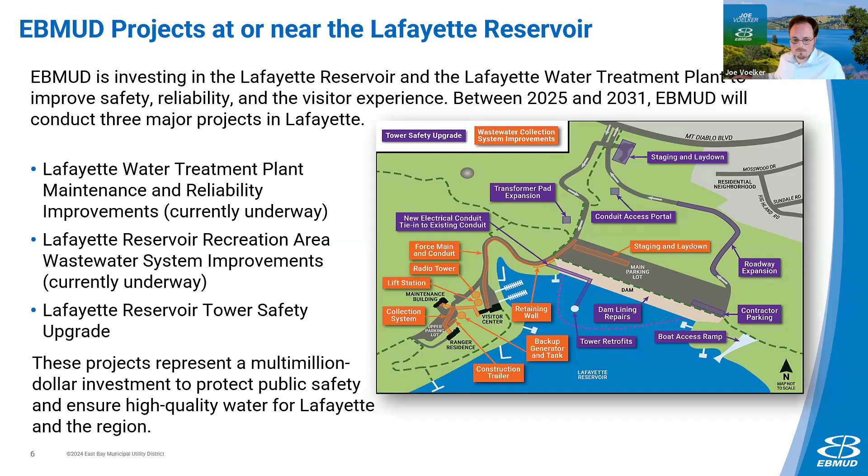Several of these efforts are already underway, and I'll briefly walk through how those projects align before getting into the tower project here, schedule-wise.

This timeline shows how these projects align. Water treatment plant reliability work began in the fall of 2025 and will continue through 2031. The wastewater project also began in the fall of 2025 and continues through the fall of 2026. Preparation work for the tower has been underway since last summer, with major construction scheduled for spring 2026 through fall 2027. We're coordinating these efforts closely so we can reduce overlap and limit impacts as much as possible at the reservoir and the surrounding area.

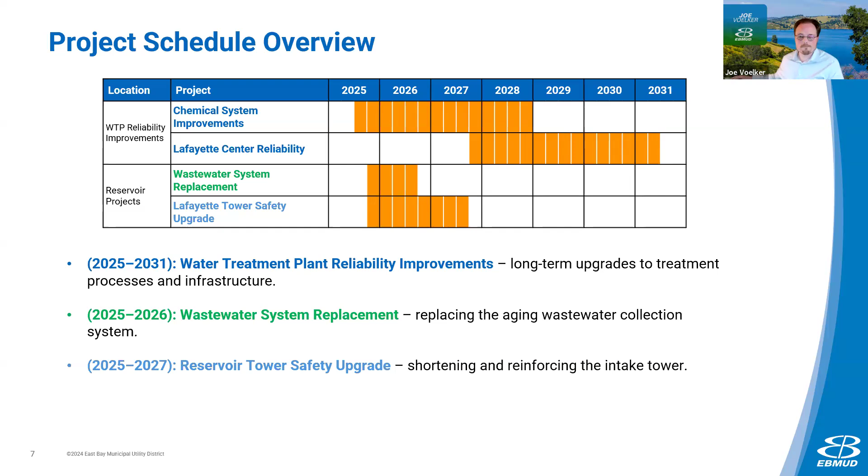Okay, so now we're going to turn specifically to the tower safety upgrade project. I'm going to review the tower's history, the regulatory requirements driving this project, and the scope of construction.

The outlet tower was constructed in 1928 as part of the original reservoir system. Its purpose is to control reservoir water levels and regulate releases through the dam. While the dam was still under construction, ground movement occurred, and because of that, the final height of the dam was reduced from the original design. The dam was completed in 1933, and since that time, the reservoir has operated safely and reliably for decades.

When the dam height was lowered, the tower remained at its original constructed elevation. As a result, today the tower extends approximately 40 feet higher than is necessary for the current reservoir's operations. That height difference is part of the historical context for the project we're discussing tonight.

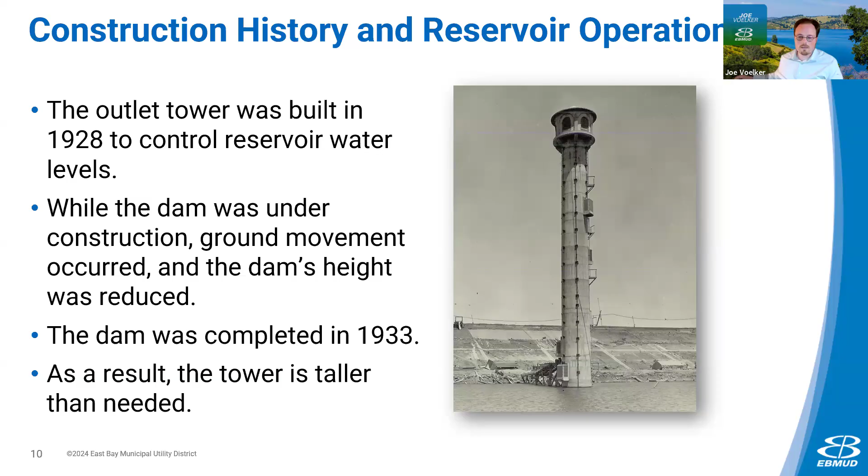The Lafayette Reservoir Dam itself remains operational and safe. The outlet tower, as we just discussed, was built nearly a century ago and was designed for a different dam height. Over time, seismic standards have evolved, especially here in California, and upgrades are required to meet today's criteria.

The California Division of Safety of Dams oversees dam safety across the state and regulates all of East Bay MUD's dams, including Lafayette. They mandated this upgrade, and they have reviewed and approved the project plan we're presenting here tonight. We've incorporated their input, and they'll remain involved throughout construction.

This project is about safety. It's about maintaining the safety of the Lafayette Dam, protecting the reservoir, and ensuring the continued safety of our downstream communities.

If you're interested in more of the technical history of the tower and the dam, how this design was developed, and how we worked with the community throughout this process, that information is also available on our project webpage. You can also watch the recording of the October 2025 community meeting, which I just walked through, for more detailed technical discussion about the project.

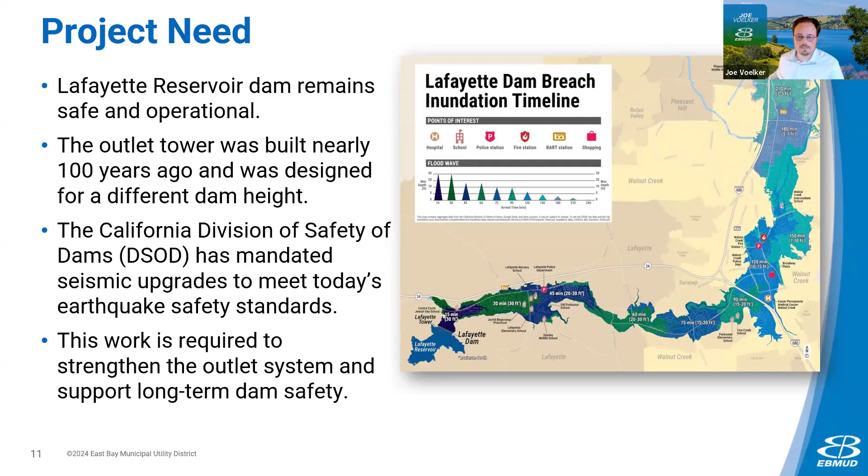At a high level, this project includes safety upgrades required by the state to bring the outlet system up to today's seismic standards. The most noticeable change will be when we increase the resiliency and shorten the tower by about 40 feet so it better matches the current dam height.

We'll also be upgrading the outlet conduits that run underneath the dam and move water from the reservoir. These are key parts of the outlet system and need to meet the modern seismic criteria as well. In addition, we'll be doing maintenance and equipment upgrades to help ensure the dam and tower continue operating reliably for decades to come. Construction is planned to begin in the spring of 2026 and continue through fall of 2027.

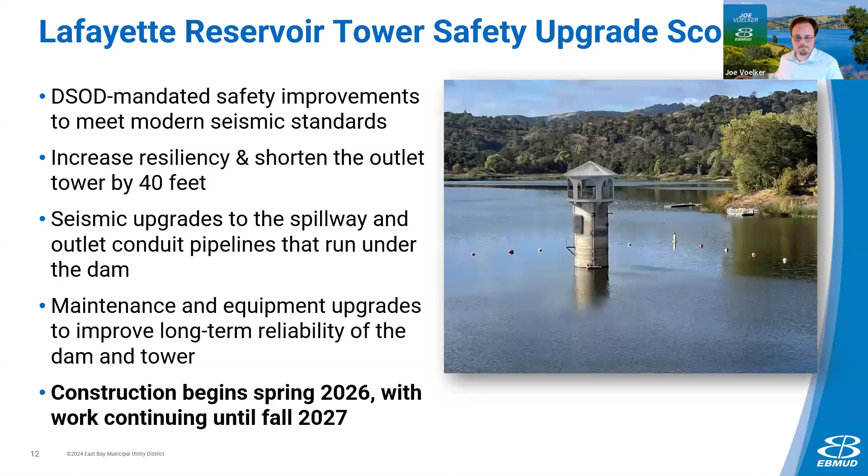Now that we've covered the history and the need for the project and what the work will include, let's talk about what construction will actually look like and what visitors should expect at the reservoir over the coming months.

As I mentioned, construction will begin in spring of 2026 and continue through fall of 2027. This work will take place in several phases. The early phase will focus on site setup, staging areas, and access improvements to prepare for the work. The tower and dam construction is expected to occur during the summer through the fall of 2026, with additional work continuing into the fall of 2027 until the project is completed.

Construction traffic will access the site from Highway 24 using the Acalanes Road exit, and there will be no hauling through downtown Lafayette. Work will generally occur Monday through Friday between 8 a.m. and 6 p.m.

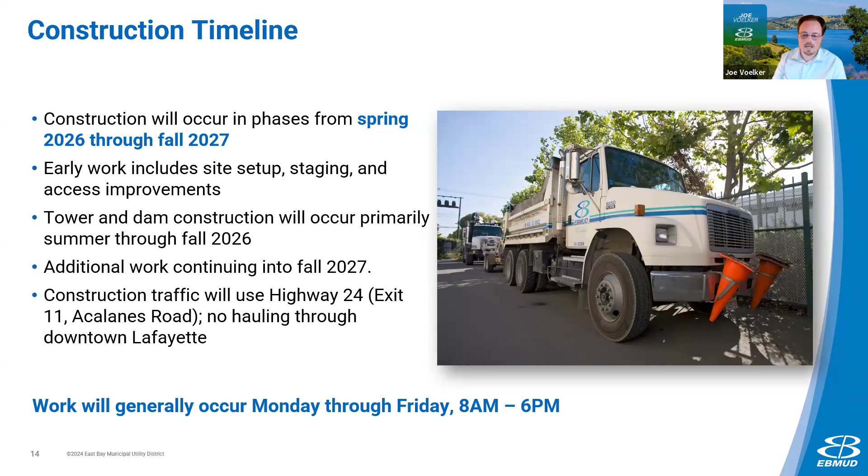This gives you a visual of where the main construction areas for the tower project will be located around the reservoir.

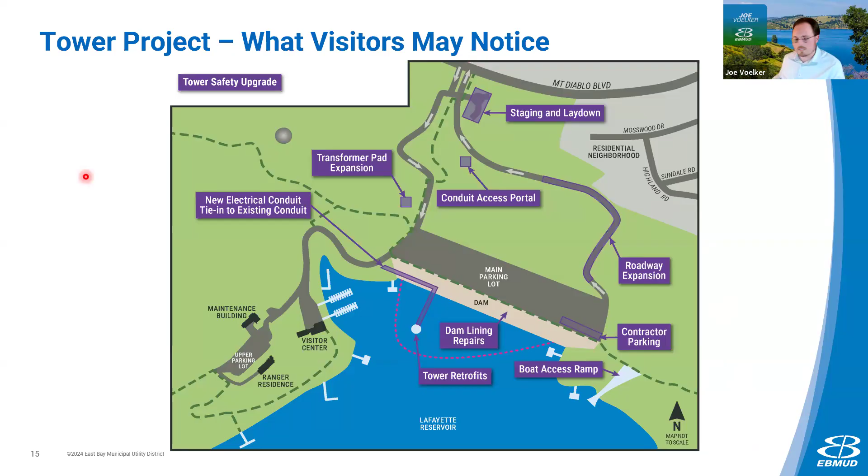I wanted to put this slide on here so you can see the total impact and cumulative effect of what you're going to see when you come into the park. You'll notice a staging and laydown area here, and you'll see stuff throughout the park. We're going to get into every specific on what you'll see and how you'll feel it over the next coming slides.

Beginning next month, approximately the third week of March, construction crews and equipment will mobilize to the reservoir. During this initial phase, two staging areas will be established and a temporary field office will be constructed to support this project.

Throughout March and continuing through the end of April, crews will be performing tree work in designated areas and widening the access road. Because of that road work, visitors may experience temporary delays when exiting the park. At times, crews will be flagging traffic to ensure it is safe to leave, and delays of approximately 15 to 20 minutes are possible during this period.

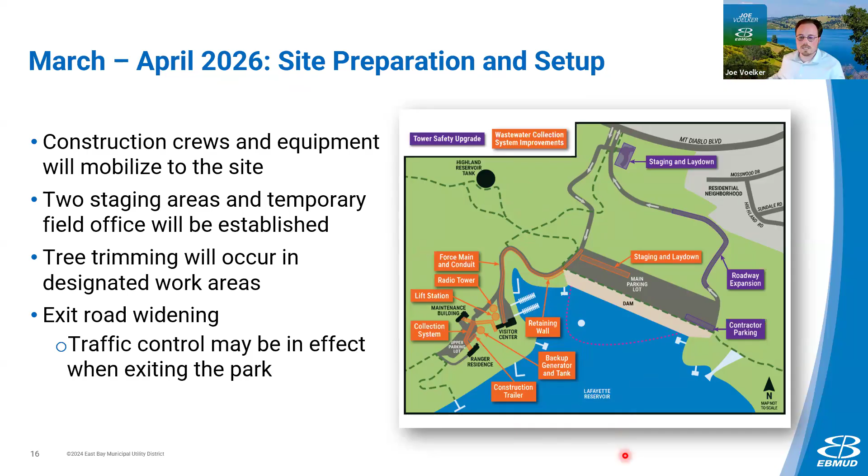I've left the wastewater collection system improvement footprint on this map as well, so you can see there will be two staging areas on top of the dam, as well as roadway expansion and a staging area. This is where you'll first start to see our presence for the tower project at Lafayette Reservoir from mid-March through the end of April, while the wastewater system improvements project continues until fall of 2026. So you're seeing this now month to month.

This slide covers what visitors should expect to see during the tower and dam portion of our work, between May and fall of 2026. During this phase, a crane barge and other marine equipment will be visible on the reservoir. Work will take place both on the water and along the dam itself. The outlet tower will be fully surrounded by scaffolding and work platforms. Work will also occur along the face of the dam and on nearby structures connected to the outlet system.

Visitors should expect an increase in weekday truck traffic as well as construction noise during normal working hours. There may also be temporary detours within the park while this work is underway. For those who would like to see the tower in its current form before construction progresses further, demolition is currently scheduled to begin in June 2026 on the tower.

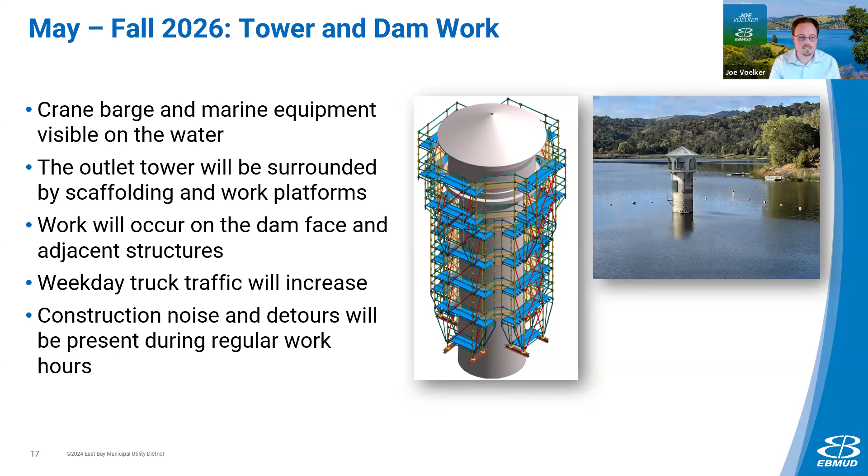This is our final phase of the project, from late 2026 through fall 2027. By winter 2026, East Bay MUD anticipates that the new operating house and the shortened tower will be completed. At that point, the most visible work at the center of the reservoir will be finished. Construction activity will then shift to the other side of the dam, towards the entrance gate side, where crews will complete remaining structural and system improvements.

During this period, visitors should continue to experience traffic control and brief delays when exiting the park, similar to what was described earlier with the roadway expansion. We currently anticipate the overall project to be completed in the fall of 2027.

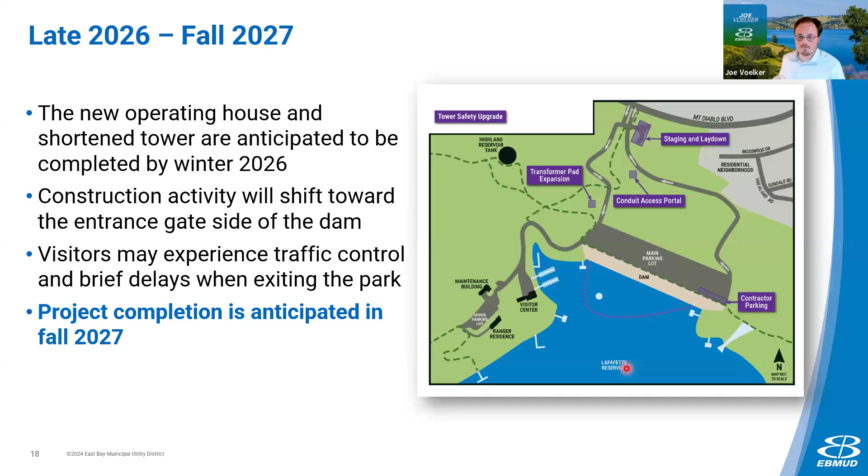This slide is intended to show what we anticipate will be the peak construction period at the Lafayette Reservoir, between spring and fall of 2026. Many of you have already seen activity related to the wastewater project when you visit the park. That work will continue through fall of 2026. At the same time, the tower safety upgrade will be ramping up and becoming more visible throughout the site. So during this window, both projects will be active simultaneously. That overlap represents the highest level of construction activity that we expect at the Lafayette Reservoir.

We know this is a park that people use every day, so during this period visitors should expect changes in parking availability, construction staging areas being erected on the dam, and potential weekday delays when entering or exiting the park. Before we move into a more detailed visitor impact, we wanted to give you a clear picture of what the overall footprint of the peak construction window will look like at the reservoir between spring and fall of 2026.

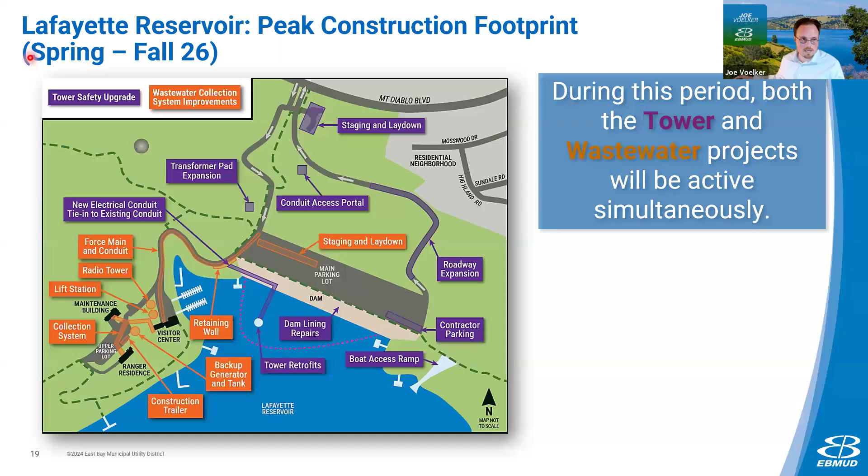There may be periodic partial-day vehicle closures at the Mount Diablo Boulevard entrance when large equipment is being mobilized into or out of the park. When that occurs, pedestrian access will remain open. We will provide advance notice at least one week ahead of any closures using electronic message boards and other communication tools.

Near the tower, visitors can expect temporary changes. That includes an expanded buoy line in the water for safety, as well as visible construction activity, noise during work hours, temporary fencing, and minor route detours around the work zone.

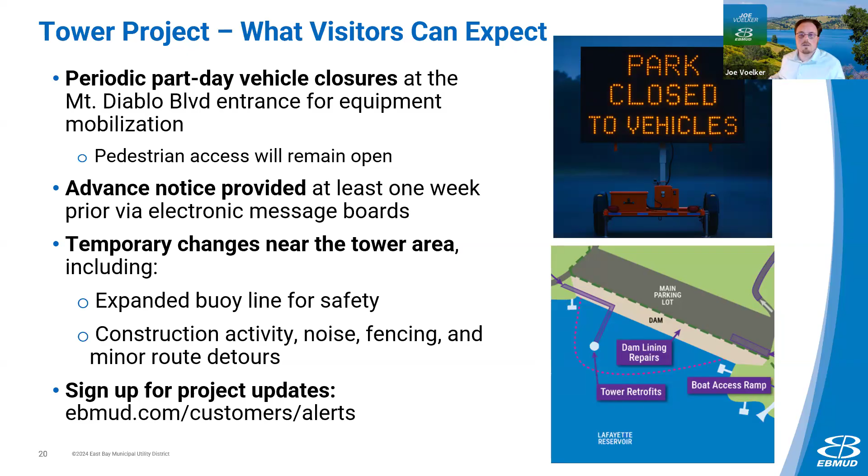For anyone who would like more detailed or ongoing updates, please sign up for project alerts at ebmud.com/customers/alerts, where we'll be posting updates. So that gives us a clearer picture of what construction should look like at the reservoir.

I'd like to now turn it over to Han Barrett Liu, our ranger supervisor of the Lafayette Reservoir. Han leads park operations there and can speak to how this work intersects with day-to-day activity at the reservoir.

Thanks, Joe. Yeah, good evening, everybody. I'm Han Barrett Liu, ranger supervisor here at Lafayette Reservoir. I've worked for EBMUD at Lafayette Reservoir for 14 years, 10 years as one of its park rangers, and for the last 4 years as its ranger supervisor. I imagine we've got a lot of folks online that I might know, so it's good to see you. And for those of you online who I haven't met yet, we hope to see you here at Lafayette Reservoir in the future. But good to be online with everybody tonight.

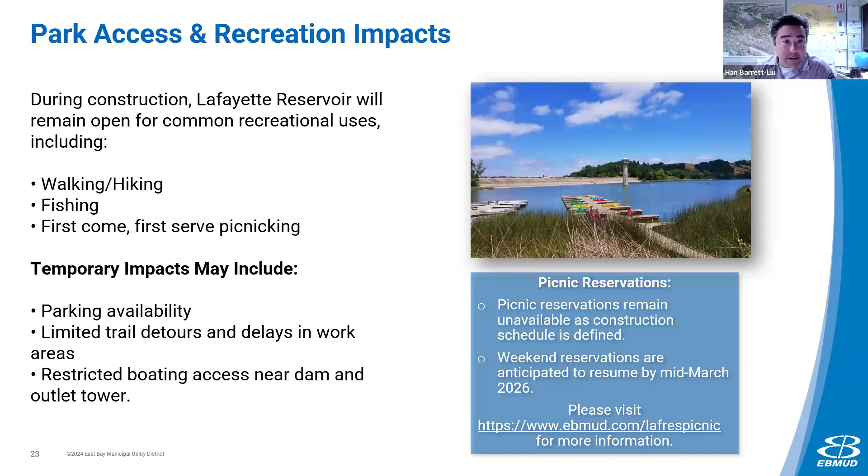All right, and we're back to this visitor construction map, which is meant to illustrate just all the different things that, some of which you're already seeing if you visit the reservoir, but which we'll expect to see work being done to moving forward. So again, a kind of a busy map there, and we know it's a busy park, and that's going to make for a busy kind of front entrance parking lot, and kind of the starts of the trails heading in either direction will be busy. There may be, again, we expect delays and detours, and appreciate your cooperation as we continue to try to keep the rec area open as much as is possible, so long as it is safe.